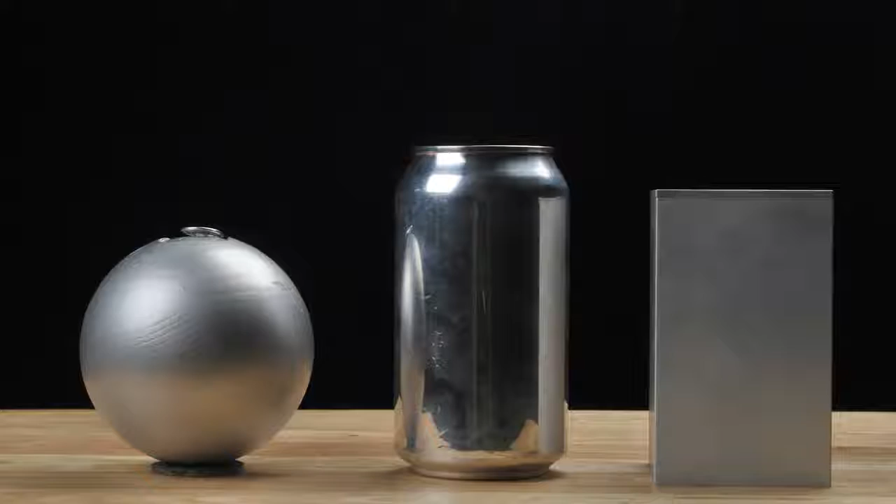From the top, it's like a sphere, and from the side, it's like a cuboid. A cylinder has a maximum packing factor of about 91%, not as good as the cuboid, but better than the sphere. Most important of all, the cylinder can be rapidly manufactured.

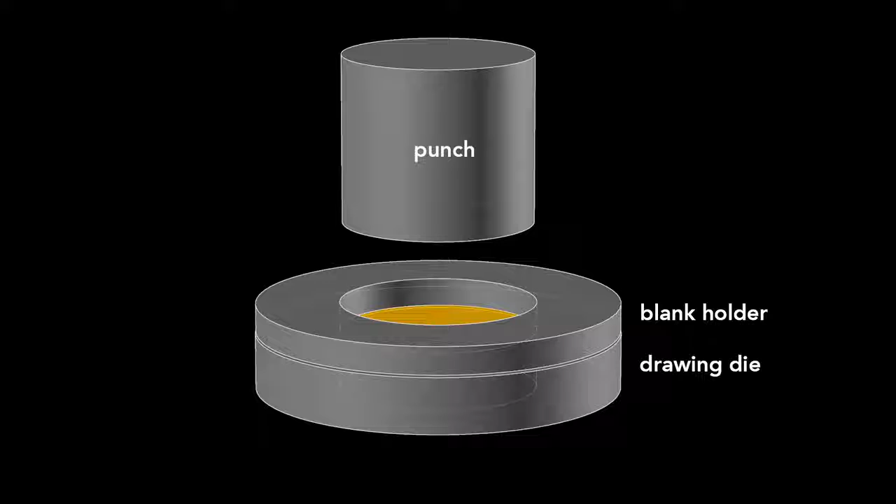The can begins as this disc called a blank, punched from an aluminum sheet about 3/10 of a millimeter thick. The first step starts with a drawing die, on which sits the blank and then a blank holder that rests on top. We'll look at a slice of the die so we can see what's happening. A cylindrical punch presses down on the die, forming the blank into a cup. This process is called drawing.

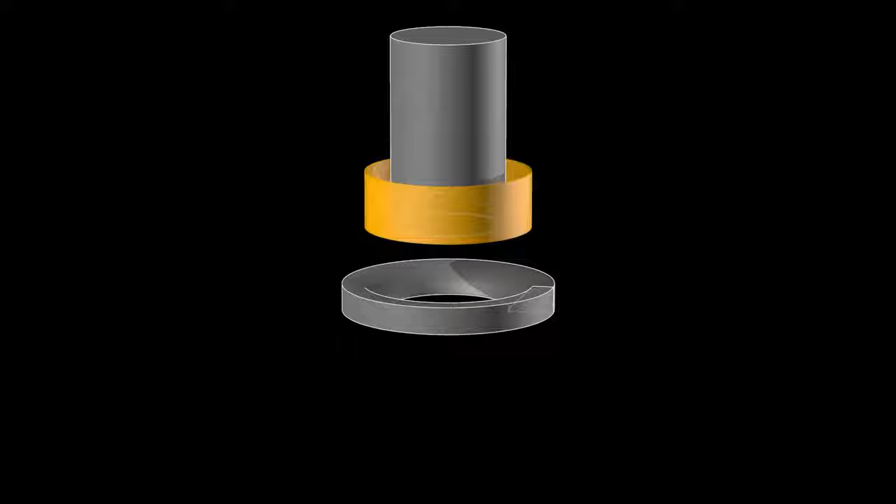This cup is about 88 millimeters in diameter, larger than the final can, so it's redrawn. That process starts with this wide cup and uses another cylindrical punch and a redrawing die. The punch presses the cup through the redrawing die and transforms it into a cup with a narrower diameter, which is a bit taller. This redrawn cup is now the final diameter of the can, 65 millimeters, but it's not yet tall enough.

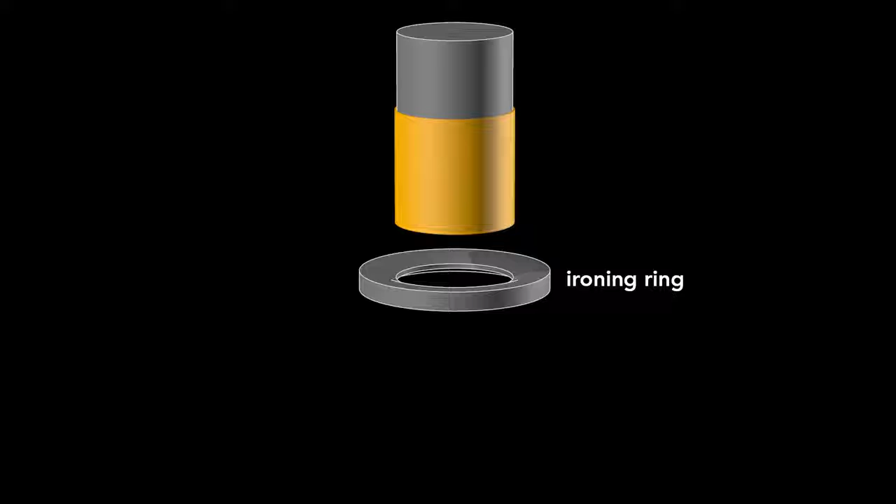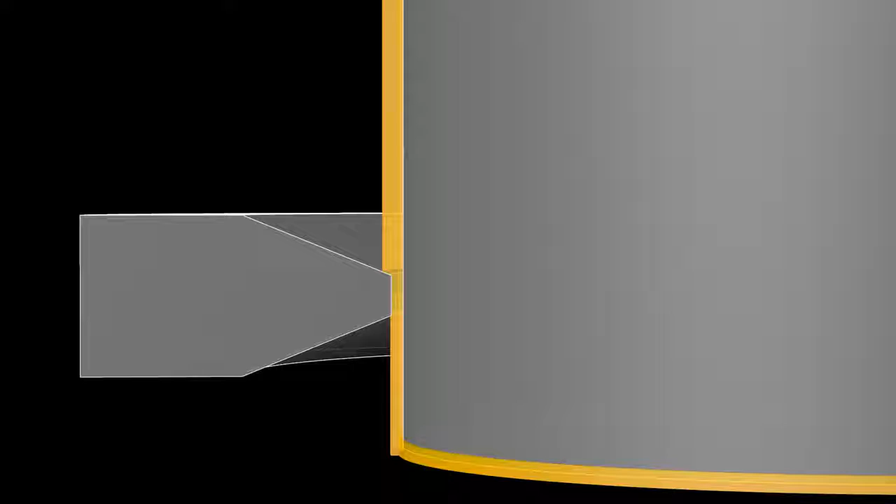A punch pushes this redrawn cup through an ironing ring. The cup stays the same diameter as it becomes taller and the walls thinner. If we watch this process again up close, you see the initial thick wall and then the thinner wall after it's ironed. Ironing occurs in 3 stages, each progressively making the walls thinner and the can taller.

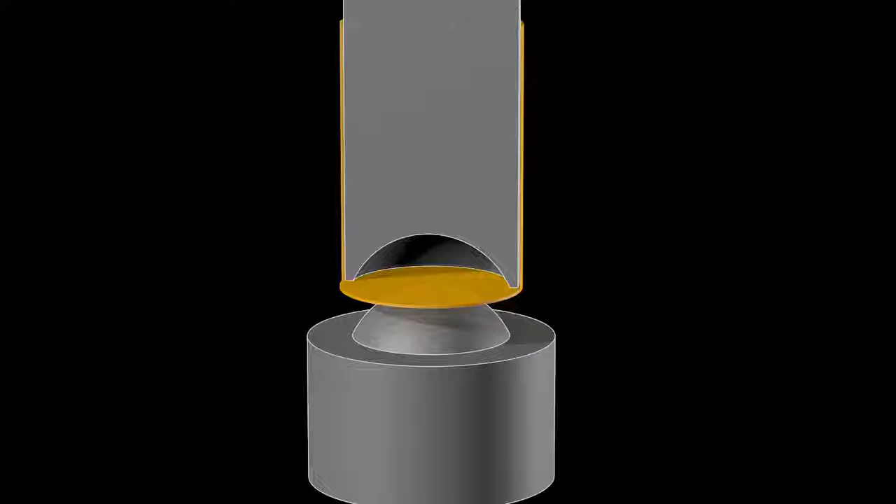After the cup is ironed, the dome on the bottom is formed. This requires a convex doming tool and a punch with a matching concave indentation. As the punch presses the cup downward into the doming tool, the cup bottom then deforms into a dome. That dome reduces the amount of metal needed to manufacture the can. The dome bottom uses less material than if the bottom were flat.

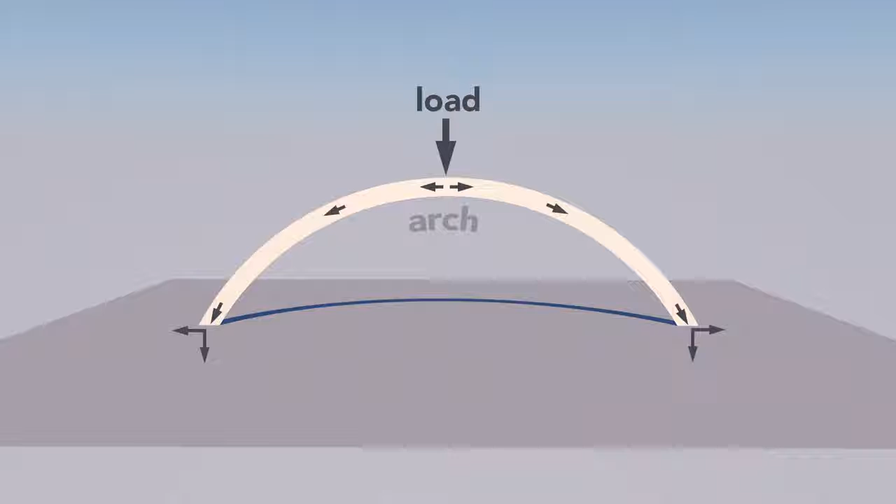A dome is an arch revolved around its center. The curvature of the arch distributes some of the vertical load into horizontal forces, allowing a dome to withstand greater pressure than a flat beam.

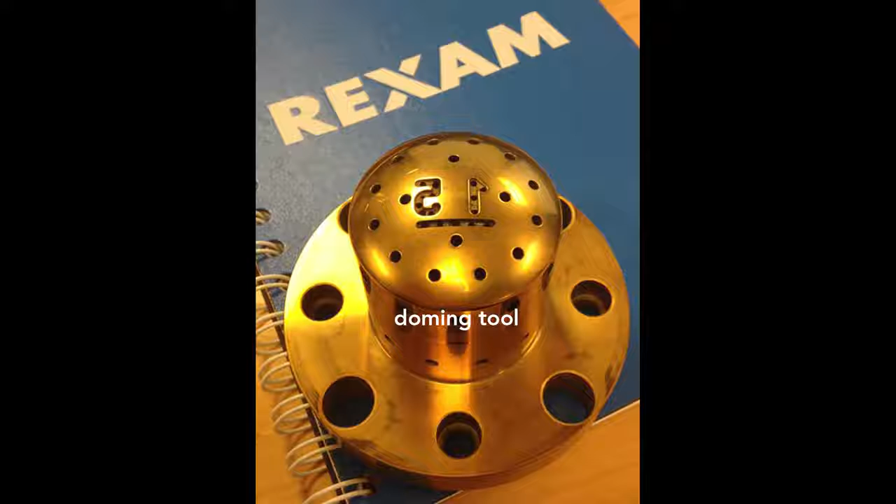On the dome, you might notice 2 large numbers. These debossed numbers are engraved on the doming tool. The first number signifies the production line in the factory, and the second number signifies the body maker number. The body maker is the machine that performs the redrawing, ironing, and doming processes. These numbers help troubleshoot production problems in the factory. In that factory, the manufacturing of a can takes place at a tremendous rate.

These last 3 steps, redrawing, ironing, and doming, all happen in one continuous stroke and in only 1/7 of a second. The punch moves at a maximum velocity of 11 meters per second and experiences a maximum acceleration of 45 Gs. This process runs continuously for 6 months or around 100 million cycles before the machine needs servicing.

Now, if you look closely at the top of the can body, you see that the edges are wavy and uneven. These irregularities occur during the forming. To get a nice, even edge, about 6 millimeters is trimmed off of the top. With an even top, the can can now be sealed.

But before that sealing occurs, a colorful design is printed on the outside. The term of art in the industry is decoration. The inside also gets a treatment. A spray-coated epoxy lacquer separates the can's contents from its aluminum walls. This prevents the drink from acquiring a metallic taste and also keeps acids in the beverage from dissolving the aluminum.

The next step forms the can's neck, the part of the can body that tapers inward. This necking requires 11 stages. The forming starts with a straight-walled can. The top is brought slightly inward, and then this is repeated further up the can wall until the final diameter is reached. The change in neck size at each stage is so subtle that you can barely tell a difference between one stage and the next.

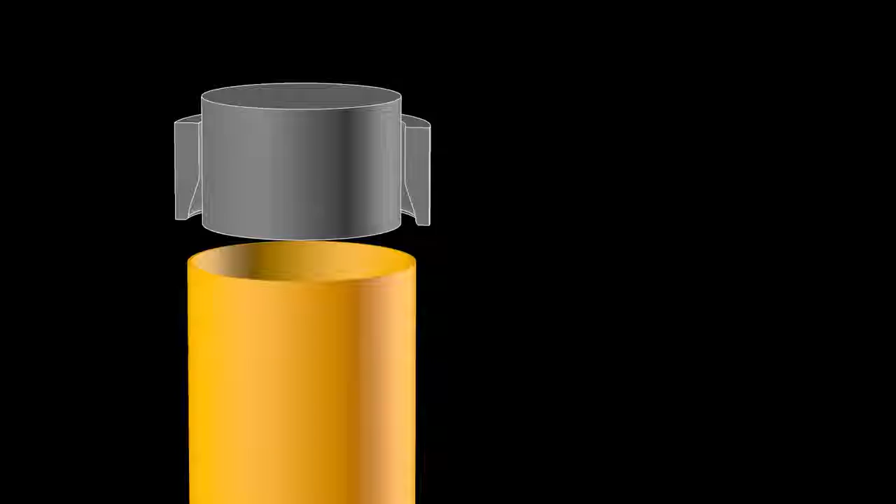Each one of these stages works by inserting an inner die into the can body, then pushing an outer die, called the necking sleeve, around the outside. The necking sleeve retracts, the inner die retracts, and the can moves to the next stage. The necking is drawn out over many different stages to prevent wrinkling or pleating of the thin aluminum.

Since the 1960s, the diameter of the can end has become smaller by 6 millimeters, from 60 millimeters to 54 millimeters today. This seems a tiny amount, but the aluminum can industry produces over 100 billion cans a year, so that 6 millimeter reduction saves at least 90 million kilograms of aluminum annually. That amount would form a solid cube of aluminum 32 meters on a side. Compare that to a 787 Dreamliner with a 60-meter wingspan.

Now, after the neck has been formed, the top is flanged. That is, it flares out slightly and allows the end to be secured to the body, which brings us to the next brilliant design feature, the double seam. On older steel cans, manufacturers welded or soldered on the ends. This often contaminated the can's contents. In contrast, today's cans use a hygienic double seam, which can also be made faster. This can is cut in half so you can see the cross-section of the double seam.

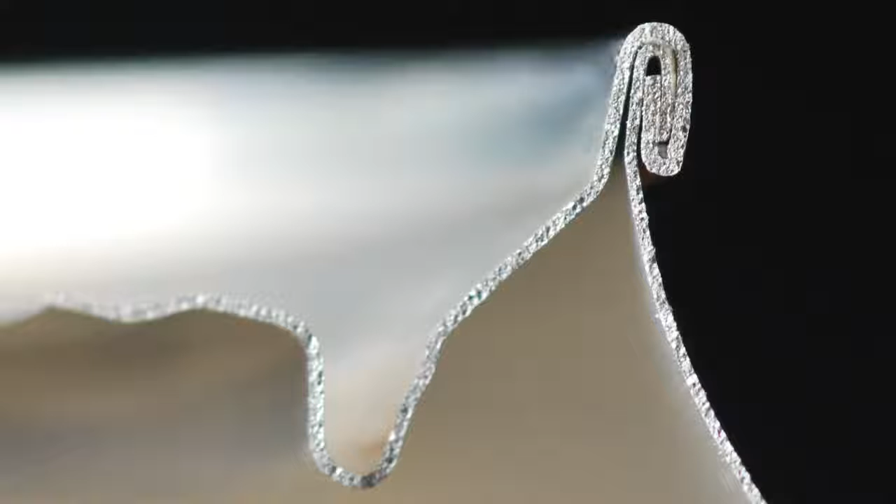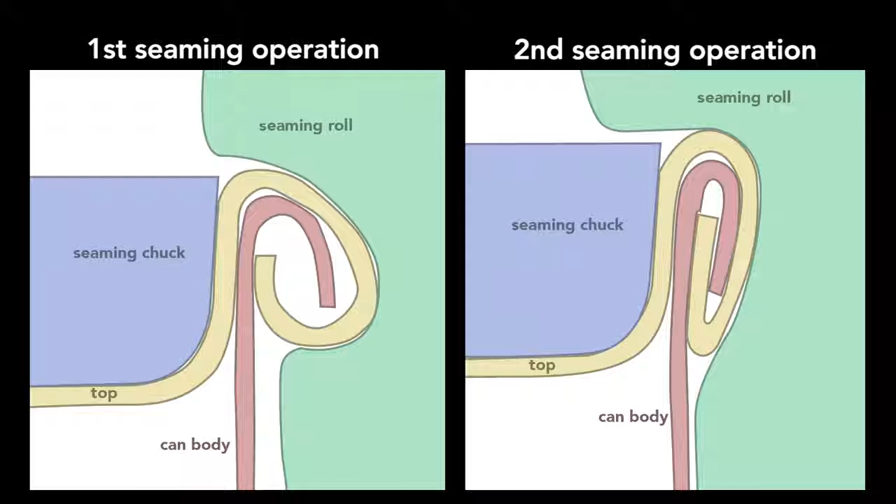To create this seam, a machine uses two basic operations. The first curls the end of the can cover around the flange of the can body. The second operation presses the folds of the metal together to form an airtight seal. While the operations themselves are simple, they require high precision. Parts misaligned by a small fraction of a millimeter cause the seam to fail.

In addition to the clamping of the end and can body, a sealing compound ensures that no gas escapes through the double seam. The compound is applied as a liquid, then hardens to form a gasket. The end, attached immediately after the can is filled, traps gases inside the can to create pressures of about 30 psi or 2 times atmospheric pressure. In soda, carbon dioxide produces the pressure. In non-carbonated drinks like juices, nitrogen is added.

So why is a beverage can pressurized? Because the internal pressure creates a strong can despite its thin walls. Squeeze a closed, pressurized can, it barely gives. Then, squeeze an empty can. It flexes easily; the can walls are thin, only 75 microns thick, and they're flimsy. But the internal pressure of a sealed can pushes outwards equally and so keeps the wall in tension.

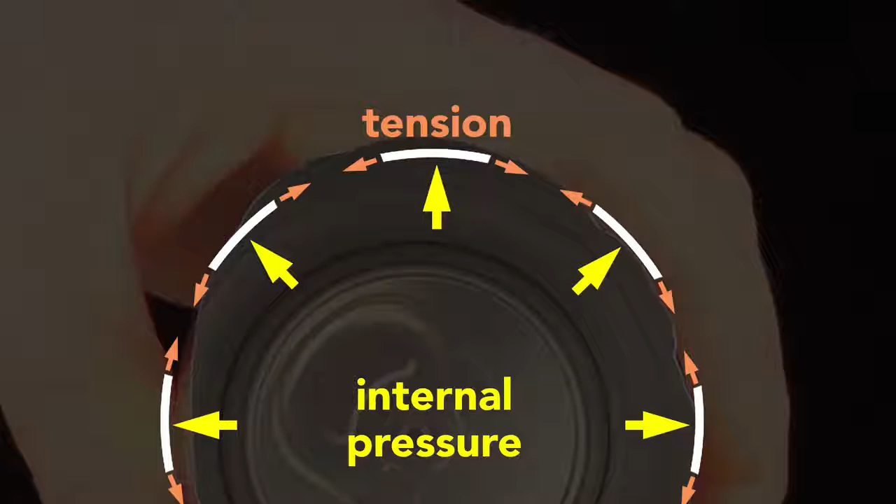This tension is key. The thin wall acts like a chain. In compression, it has no strength, but in tension, it's very strong. The internal pressure strengthens the cans so that they can be safely stacked. A pressurized can easily supports the weight of an average human adult. It also adds enough strength so that the can doesn't need the corrugations like in this unpressurized steel food can.

While initially pressurized to about 2 atmospheres, a can may experience up to 4 atmospheres of internal pressure in its lifetime due to elevated temperatures, and so the can is designed to withstand up to 6 atmospheres or 90 psi before the dome or the end will buckle.

Why is there a tab on the end of the can? It seems a silly question. How else would you open it? But originally, cans didn't have tabs. Very early steel cans were called flat tops for pretty obvious reasons. You use a special opener to puncture a hole to drink from and a hole to vent. In the 1960s, the pull tab was invented so that no opener was needed.

The tab worked like this. You lift up this ring to vent the can and pull the tab to create the opening. Easy enough, but now you've got this loose tab. The cans ask you to please don't litter, but sadly these pull tabs got tossed on the ground where the sharp edges of the tabs cut the bare feet of beachgoers or they harmed wildlife. So the beverage can industry responded by inventing the modern stay-on tab.

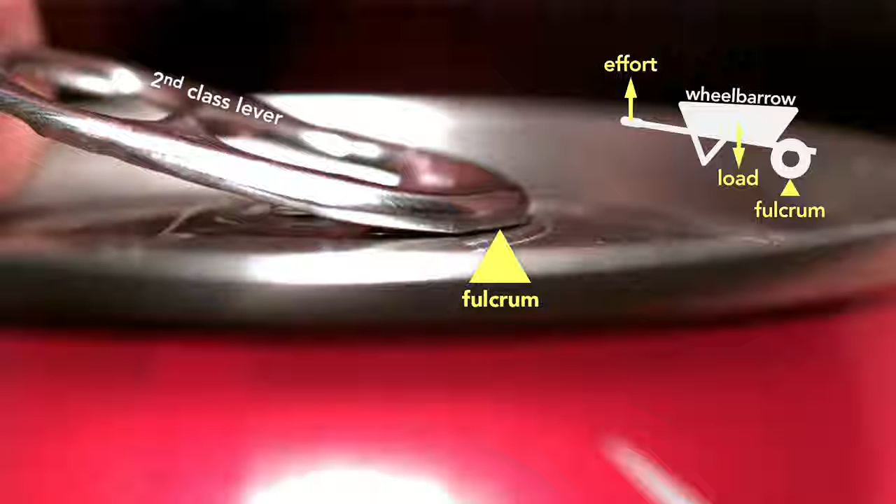This little tab involved clever engineering. The tab starts as a second-class lever. This is like a wheelbarrow because the tip of the tab is the fulcrum and the rivet the load. The effort is being applied on the end. But here's the genius part. The moment the can vents, the tab switches to a first-class lever, which is like a seesaw, where the load is now at the tip and the fulcrum is the rivet.

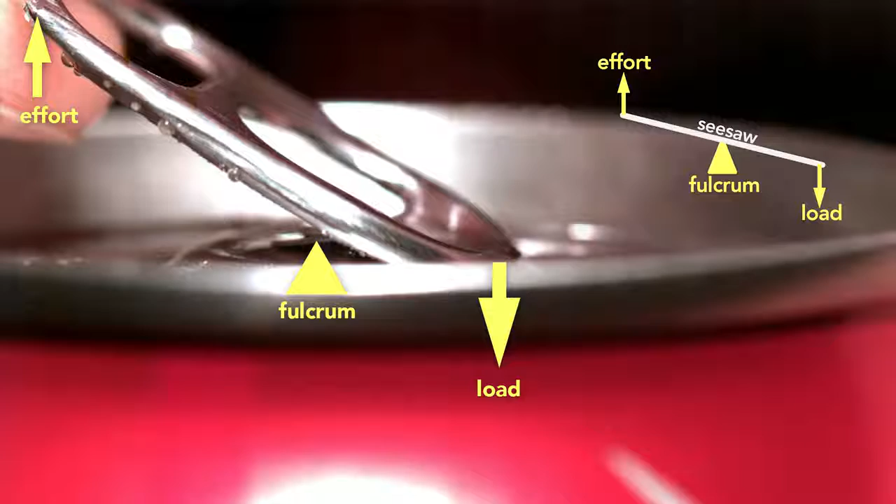You can see clearly how the tab, when working as a wheelbarrow, lifts the rivet. In fact, part of the reason this clever design works is because the pressure inside the can helps to force the rivet up, which in turn depresses the outer edge of the top until it vents the can, and then the tab changes to a seesaw lever. Looking from the inside of the can, you can see how the tab first opens near the rivet.

If you try to simply force the scored metal section into the can using the tab as a first-class lever with the rivet as the fulcrum throughout, you'd be fighting the pressure inside the can. The tab would be enormous and expensive.

The aluminum beverage can is so ubiquitous that it's easy to take for granted. But the next time you take a sip from one, consider the decades of ingenious design required to create this modern engineering marvel. I'm Bill Hammack, the Engineer Guy.